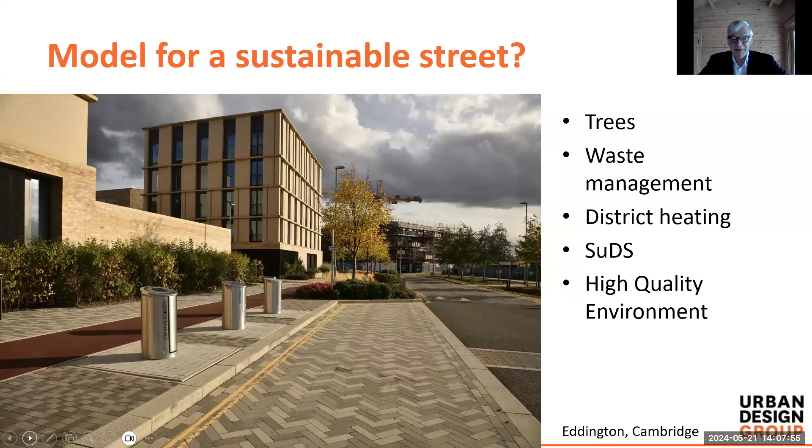This is Eddington in Cambridge - is it a model for a sustainable street? It has a number of features: you can see trees have room to grow, waste management is catered for in underground cassettes so bin bags don't clutter the footway, there's a district heating system, SuDS are incorporated, and the overall effect is a high quality environment. This tends to be the exception at the moment.

So let's look at the National Planning Policy Framework - this is one of the starting points for new development. It says that planning policies and decisions should ensure new streets are tree-lined, and that opportunities are taken to incorporate trees elsewhere in developments. It also qualifies that unless it's specific.

Is there a problem? Hello, is there a problem? No, right - no, that was background noise, Robert, continue.

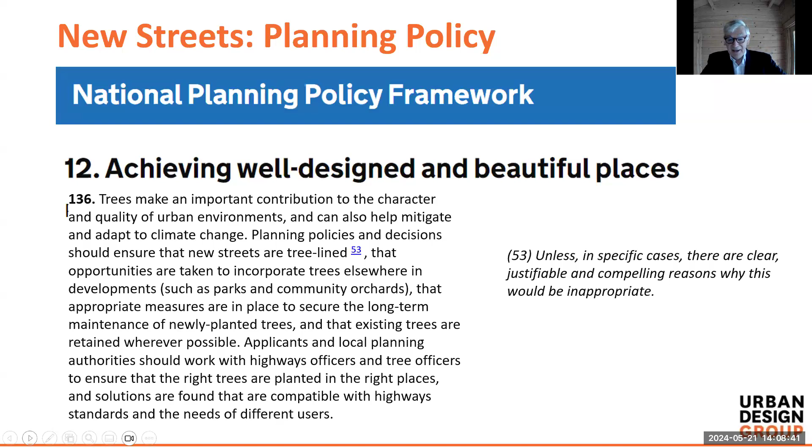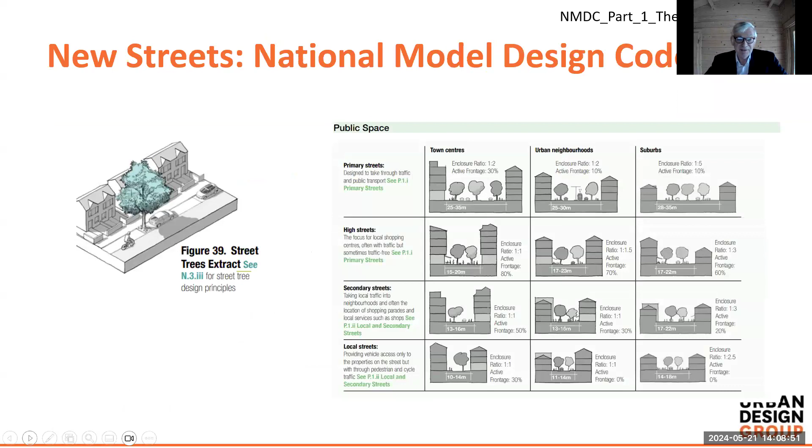Continue - yes, tree-lined streets, unless in specific cases there are clear, justifiable and compelling reasons why this would be inappropriate. There's the National Model Design Code, which contains various models for street cross-sections. Trees are covered in the coding process, and in the guidelines there are street tree design principles.

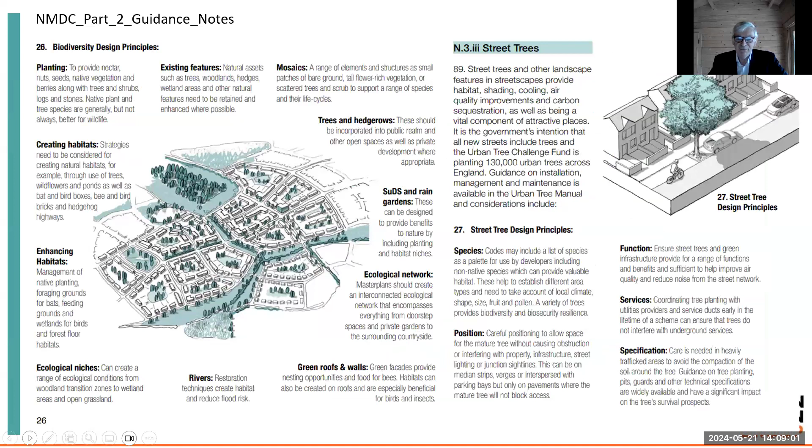So we'll leave the policy behind and go on to existing streets. So, a sustainable street retrofit.

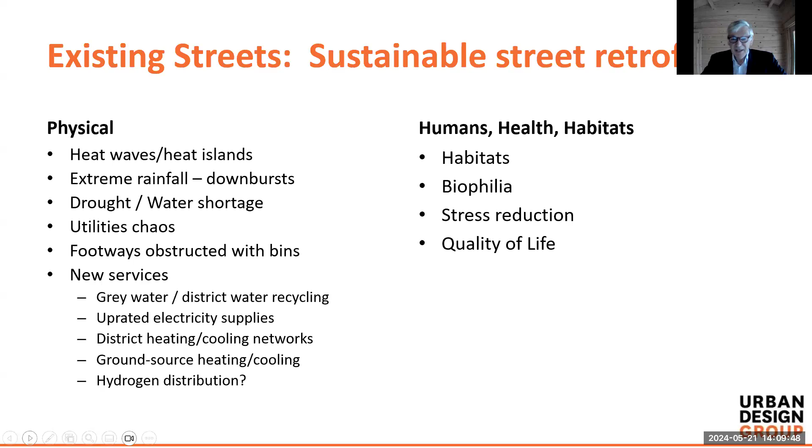We're going to face very substantial problems in the future: heat waves, heat islands, downbursts, pluvial flooding. There's the existing problem with utilities chaos, and it's something that's going to worsen as we try to work more utilities into that space - uprated electricity supplies, maybe moving over to a hydrogen distribution system, district heating and cooling networks, ground source heating. At surface level, we want to make streets more attractive places for people to enjoy and use. So sustainable street retrofit - maybe not easy, but let's have a look at this.

Balanced decisions, because we're all very siloed these days. What's the proverb? The man with a hammer sees every problem as a nail. If you're a highways maintenance person, naturally you're going to see the world's problems in terms of highways maintenance. If it's lighting, it's going to be lighting, and you don't want trees getting in the way of your lighting apparatus. Possibly if you're a tree person, you want to plant trees.

Well, the thing is that we're all part of the same local authority. It's a question of balancing all these priorities. There are things to balance. There are statutory duties - it's often quoted, the Traffic Management Act, network management duty.

This is not a duty that overrules all other duties. There are other duties - public health, duties to children. There's a common law duty of care. All of these things have to be balanced.

Similarly, the central government policies. There's the local authority's own strategy and policies, ranging from planning right through to environment. There's the Equality Act, the public sector equality duty. There's the common law of negligence. And against all of that, there is the reality of the lack of funding for maintenance.

Do remember this one - it's the Wednesbury unreasonableness principle. It's used as a basis for judicial review, but I think it's always a really good reminder as to a test for the quality of decisions that ought to be made. The decisions should be reasonable. They should take into account the things that ought to be taken into account, and they shouldn't take into account things that shouldn't be taken into account. It's common sense, really, isn't it?

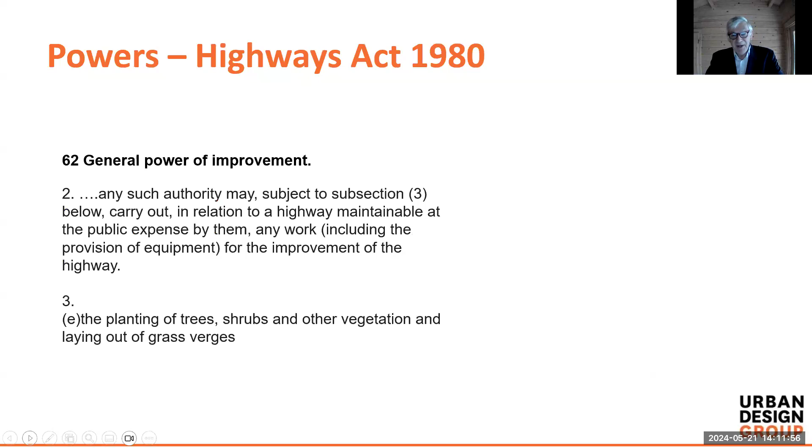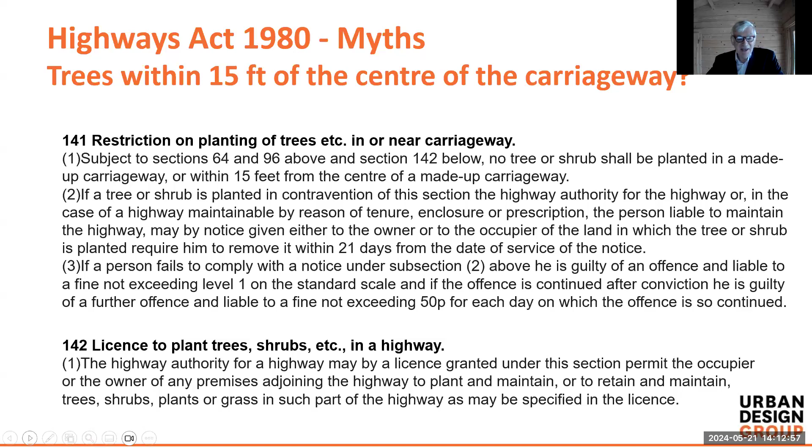And some people get scared by the legislation, and it has to be said that the Highways Act 1980 is not well drafted. There's a lot of repetition, there's a lot of confusion. It doesn't even define highways in a robust sort of way. So it's quite understandable that people pick up the wrong end of the stick. But you can plant trees within 15 feet of the centre of the carriageway. You can plant trees in the carriageway, smack in the middle, and we'll demonstrate that later on. I won't go over that.

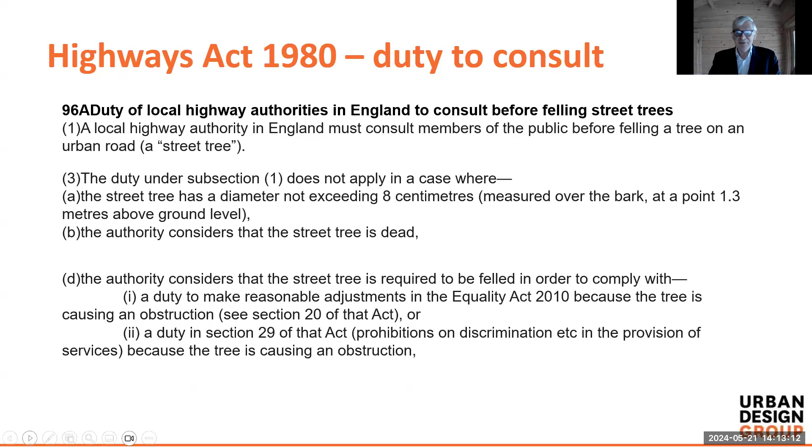There's a duty to consult before felling street trees. You can, if you're interested in this, have a look at the Highways Act. It's written in English, and if you put a towel on your head, you can understand this stuff.

So, street trees - what and where? It varies between no trees to a complete canopy, and on a range of different sorts of land. The tradition is highway maintainable at the public expense, but increasingly we're seeing holes in a highway maintainable at the public expense being held in private ownership of one sort or another, being used for planting street trees so that the highway authority avoids the maintenance burden. There's also the unadopted highway, the private street option, and then there's private land.

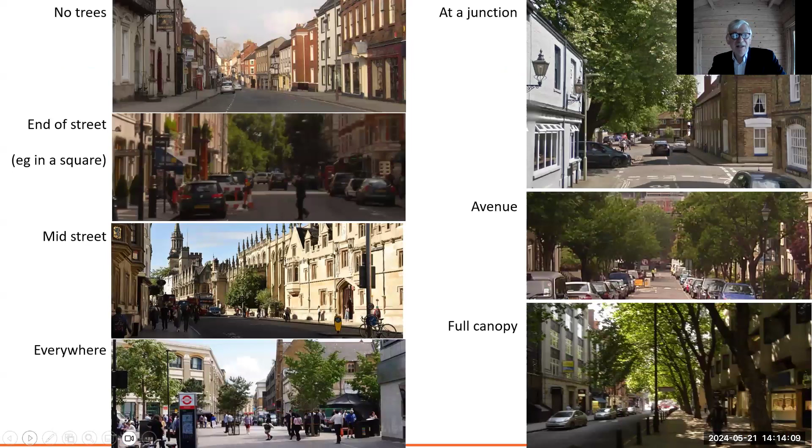There's considerable opportunities to plant trees on private land that can then oversail the highway or the street. So you can get some very big trees by using that option. Anyway, so some visual examples ranging from no trees. In medieval streets, there generally aren't trees because the streets would have been full of animals, and the animals would have eaten the trees. So the trees in medieval streets tend to be found immediately adjacent to the highway on private land, in a garden or a churchyard, that sort of thing. End of streets, in squares, at junctions, or everywhere - it can range from no trees to a full canopy.

So you feel as though you're going through a forest. Trees can be planted in a footway, in the carriageway, in build-outs, in the central median, in parking strips, in verges. There's endless opportunities to plant trees. Let your imagination run riot and know that the Highways Act 1980 gives powers to plant trees, full stop.

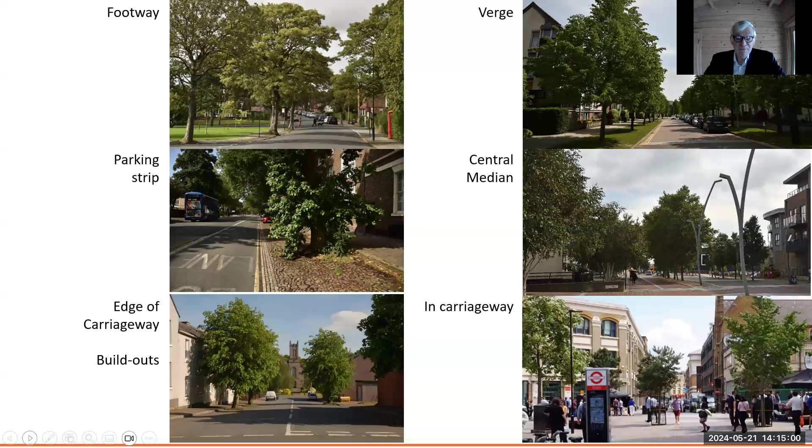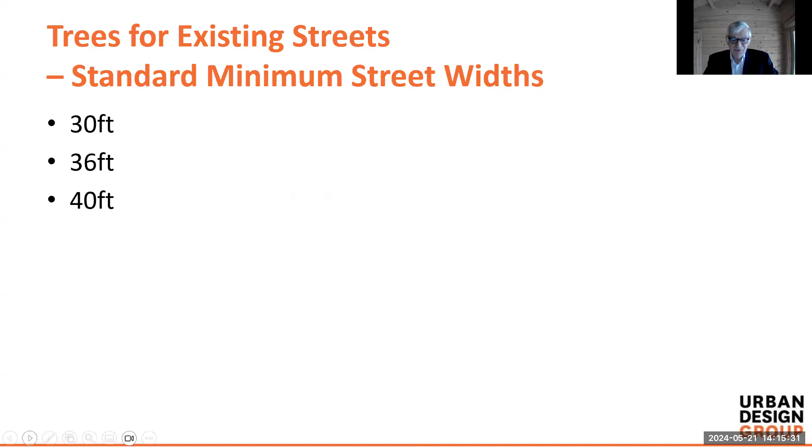I'm not suggesting that should be an option for a lot of streets, but anyway, it can be done. So let's look at existing streets. There are standard minimum street widths that have persisted for centuries. The 1847 Town Improvement Clauses Act set the minimum width of a highway as 30 foot. This applies to towns, so we're talking about urban areas, not rural areas.

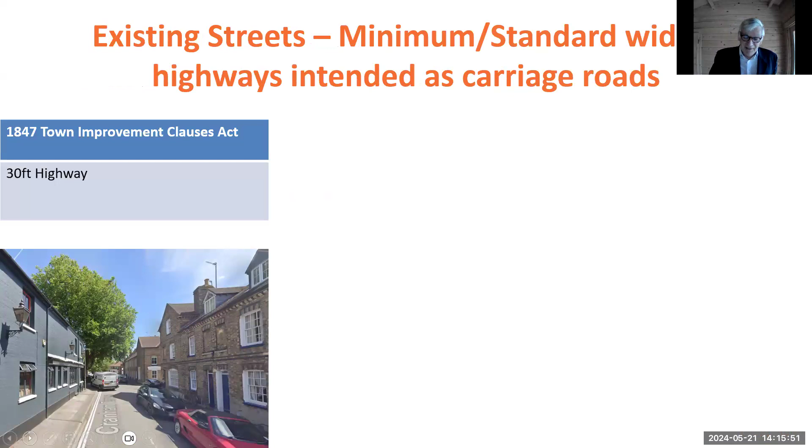Difficult to get a street tree in these circumstances, but you can put it on private land. The 1875 Public Health Act created the provision of the model bylaws, a sort of building regulations manual for streets of the day. This set the minimum width of a highway intended as a carriage road as 36 foot between the building lines, 24 foot width for the carriageway - a width we don't approve of nowadays because it encourages close passing of cyclists when they're being overtaken by car users - and two 6-foot footways, or footways of at least 6 foot on either side.

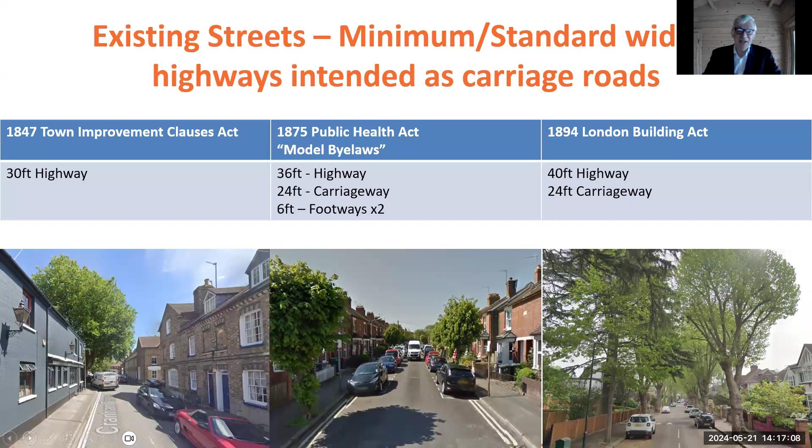The London Building Act 1894 increased the minimum width to 40 foot, and that 40-foot width got picked up in many other areas as well, going beyond the 36-foot standard required in the model bylaws. So this now applies to boroughs, urban district councils, cities. It doesn't apply if the local authority in question was a rural district council. But you have to go back into your local government history to ascertain what was the council in that particular area.

This is Blackpool. I think this is a 30-foot street. I forgot to measure it, but you can see there's no trees at all. Well, you may regard this as being a bit grim now, but when it was built, it would have been a lot better than the conditions that a large majority of the population would have been living in.

A street in Crewe. This is a classic bylaw street, 36 foot wide, 6 foot footways, 24 foot carriageway. The reason for 24 foot was so that you could have a vehicle parked on either side of the road with room for a third to go through the middle. And that's what you find in a lot of these streets. Once people start parking in the footway, then everybody tends to do it.

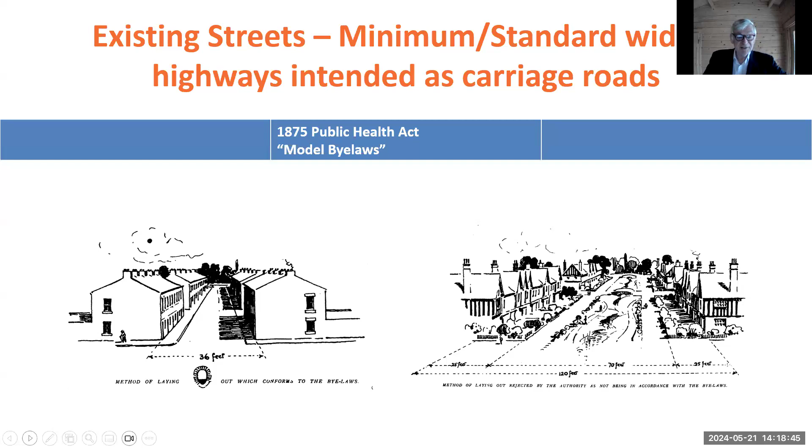People are getting more and more enthusiastic about trees, landscape feature, greenery, open spaces, clean air, and healthy country living, that sort of stuff. And it's reflected in various movements, like the Town and Country Planning Association. So this is a model village in York, New Earswick, and you can see the sort of landscapes and streetscapes being delivered - lower density, plenty of trees and grass verges.

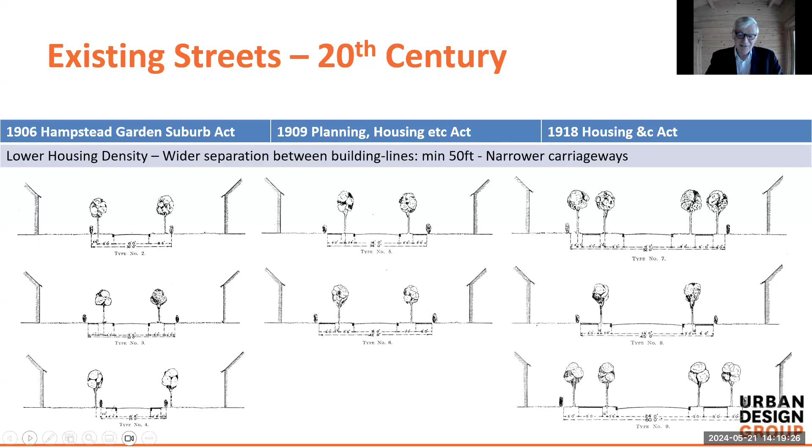So into the 20th century, we've got streets being designed with trees incorporated right from the outset. So the problems are going to be very much with 19th century streets and prior, in terms of introducing new trees.

So challenges, damage to footways - I'll come to in just a moment - but some people say you don't want to plant trees because they're a hazard to drivers. There's currently a movement to adopt a systems approach to roadside safety - passive safety, it's called, crash-friendly roadside environments.

Frangible posts and columns are being introduced, and there's the case of Marc Bolan, rock musician, who died when the car in which he was being driven left the road and hit a tree, although apparently death was due to hitting a post rather than the tree. Well, yes, nobody wants anybody to be injured or killed on the road. The thing is, when you get to an urban area, it's not just trees, and you don't want to crash into a tree - the car is not going to come off well.

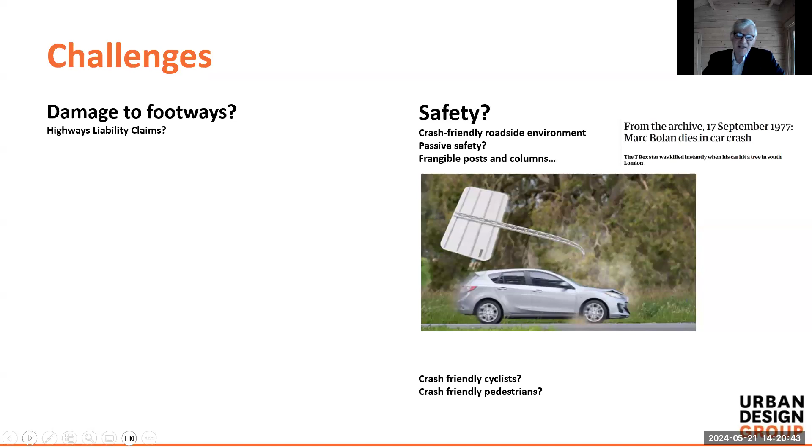But there are going to be vulnerable road users occupying the same environment, and cars and vehicles should not be leaving the road at all. Just as much as a car could hit a tree, it could hit a pedestrian or a cyclist, and cyclists and pedestrians are not crash friendly.

Footway defects - well, the main issue there is utilities opening and the overrunning of footways by vehicles. The repeated opening of highways breaks the surface, and the remediation is very rarely conducted in a robust way. Compaction doesn't occur, so the surface will subside and produce a trip hazard.

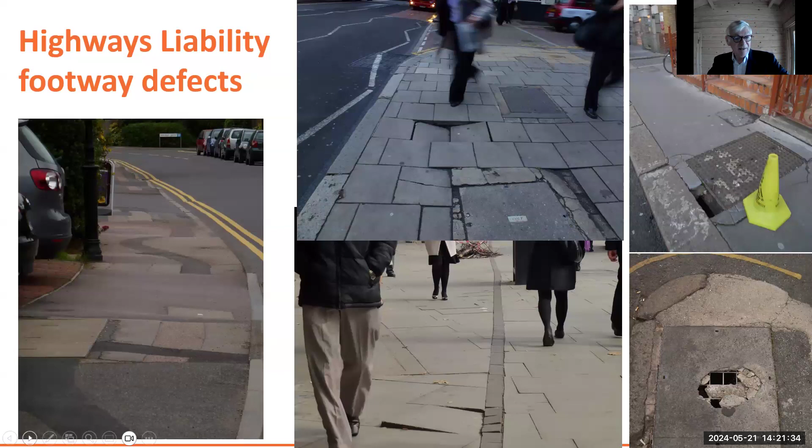It is possible for street trees to lift paving slabs, but it's something that can be dealt with by maintenance. It's hugely important, and we're back to this balanced decision making. Trees can produce problems, but problems do have solutions. And if it's a toss-up between no trees and trees with occasional problems that can be addressed by maintenance, let's go for trees and maintenance.

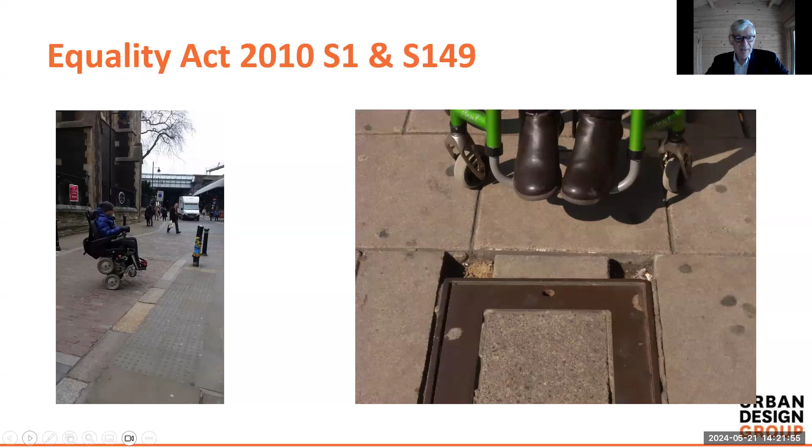Are these material obstructions, hindrances, or inconveniences? Just as much as a tree planted in a footway - one could say it's obstructing the highway, but is it a material obstruction? Is it actually stopping people from getting past? In the vast majority of instances, it won't be stopping people getting past. It will be a temporary hindrance in the way, but people can get past it.

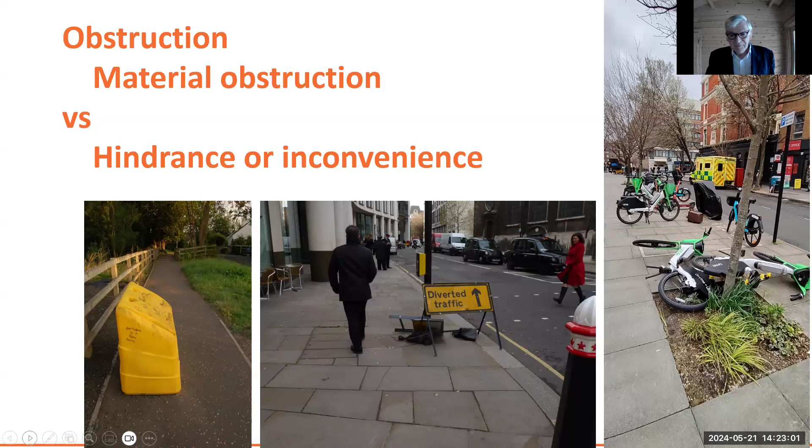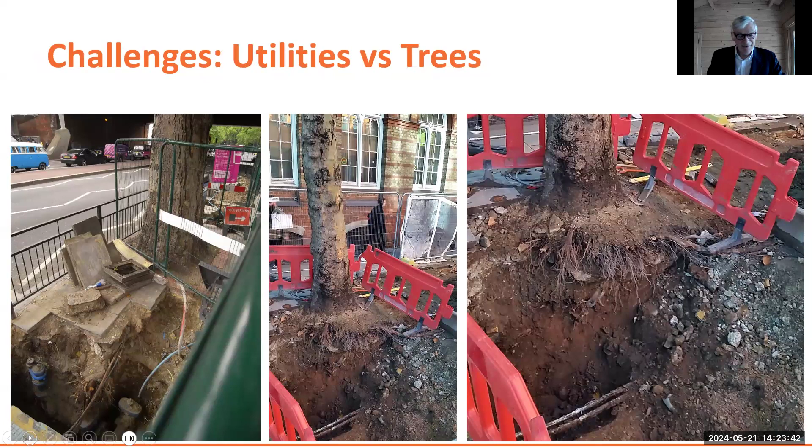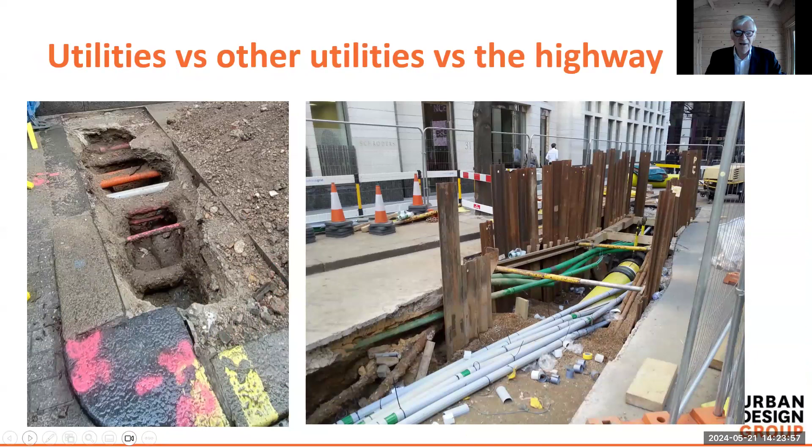But utilities are problems within themselves - they're in conflict with each other. Often utilities openings to repair utilities will damage other utilities, and there's this perpetual cycle. Most urban streets are absolutely crammed full of pipes, cables, conduits, and well, there's been guidance, but is it fit for modern purposes?

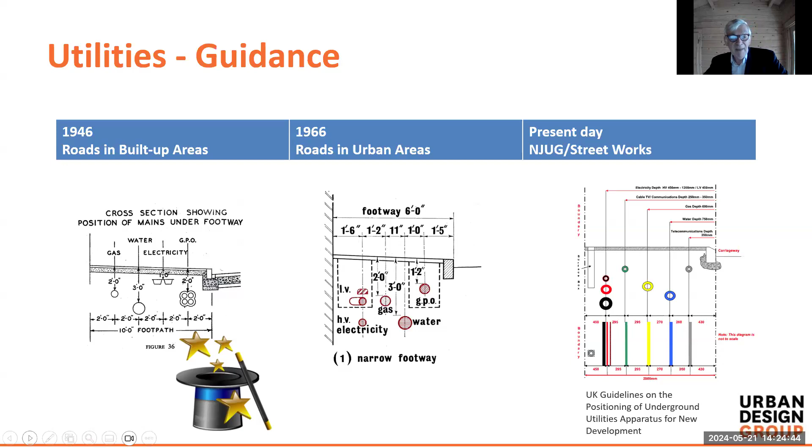On the left, 1946, you've got a cross-section of a footway. It refers to a 10-foot footpath. Well, I don't think there are an awful lot of 10-foot footpaths or footways, so a bit of magical thinking there - that's why that hat's there, by the way. On the right-hand side, the present-day National Joint Utilities Group, or Streetworks, guidance. As you can see, there's just a direct evolutionary path. Say probably for over 100 years, they've been doing basically the same sort of thing, although the amount and sophistication of utilities has increased quite dramatically.

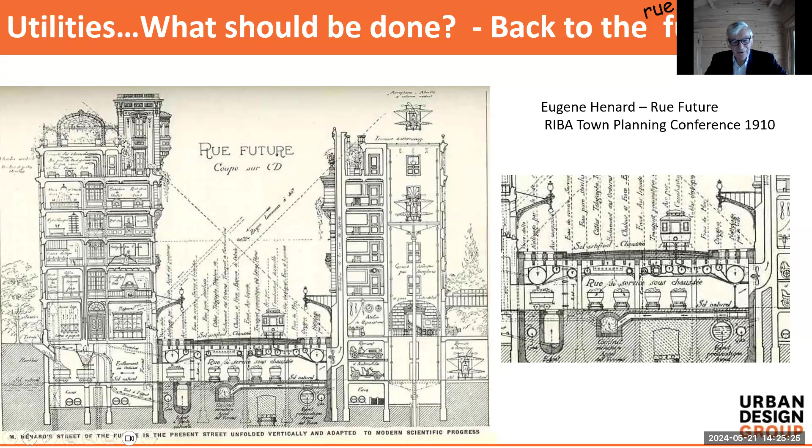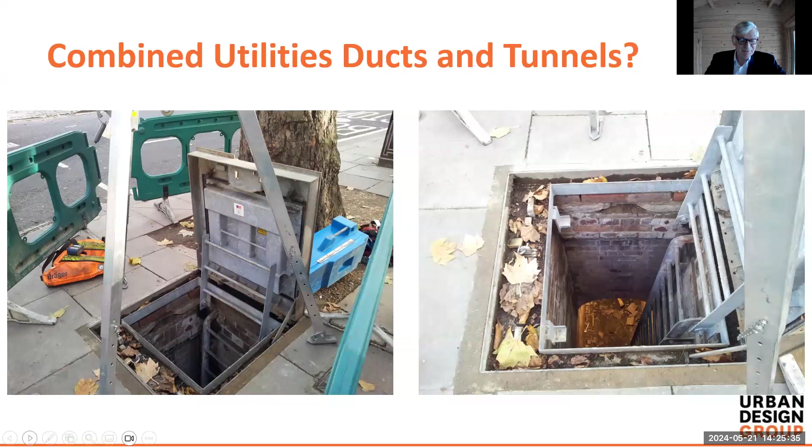Also, over 100 years ago, there was a bloke called Eugene Henard, who gave a paper at the Royal Institute of British Architects Town Planning Conference on the future, and he advocated this fully designed approach to incorporating utilities and services. Maybe if we're going to sweat our streets, encourage compact city living, and create environments that can deal with all that climate change can and will throw at us, then maybe we need to be thinking something along these lines. There are combined utilities ducts and tunnels. In some cities you can find these - more on the continent than in the UK, because perhaps we're a bit backward when it comes to these things, shockingly.

There's the National Underground Asset Register that is being brought through. The notion is that within a couple of years, this will be available, and all underground assets will have been properly mapped. And the detail provided by the mapping will increase progressively over time.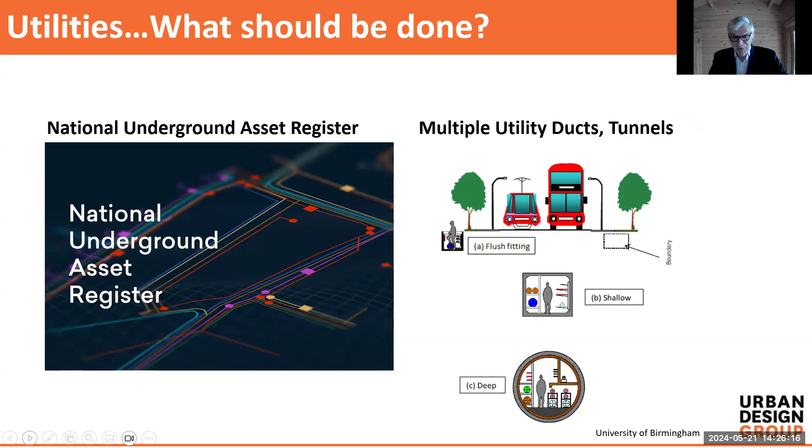The University of Birmingham has been doing a tremendous amount of research on multiple utility ducts and tunnels. Once we can get the utilities ordered, a place for everything and everything in its place, then space will be yielded to do other things. Maybe, just as we've got a national model design code, we need a national underground design code that covers all of the things we will increasingly need to place under the surfaces of streets, ranging from drainage through to energy, sewerage, communications, and of course, tree roots.

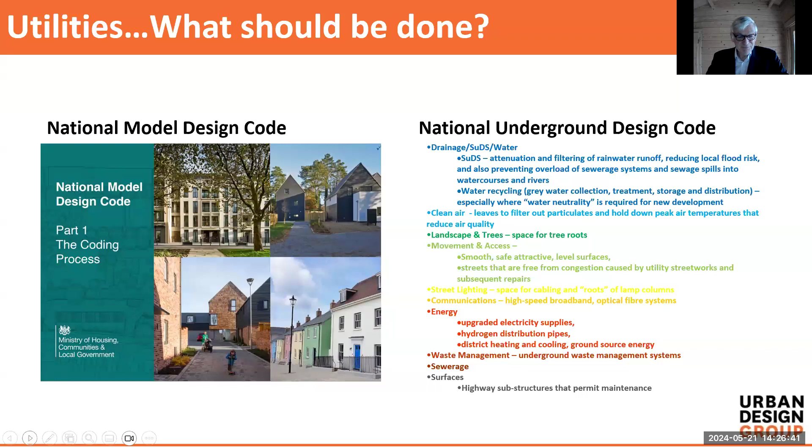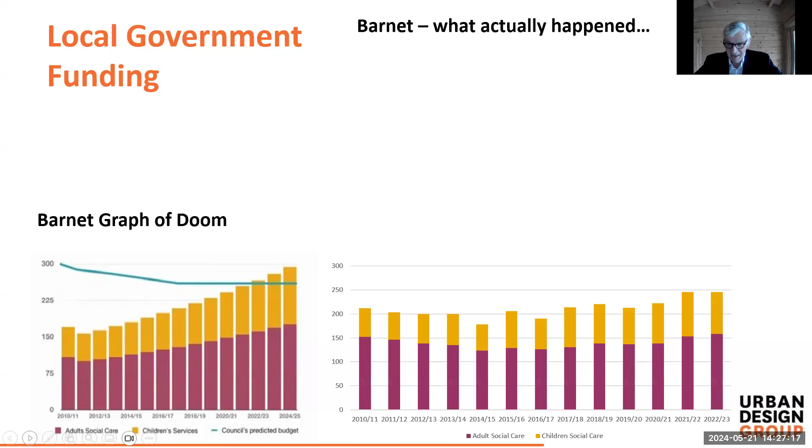What actually happened? Well, it wasn't quite as bad as that, but the demand for expenditure on children's social care has gone up significantly. And local authorities are constantly being criticised in the press for the quality of care provided. It's a pretty grim time to be in a local authority.

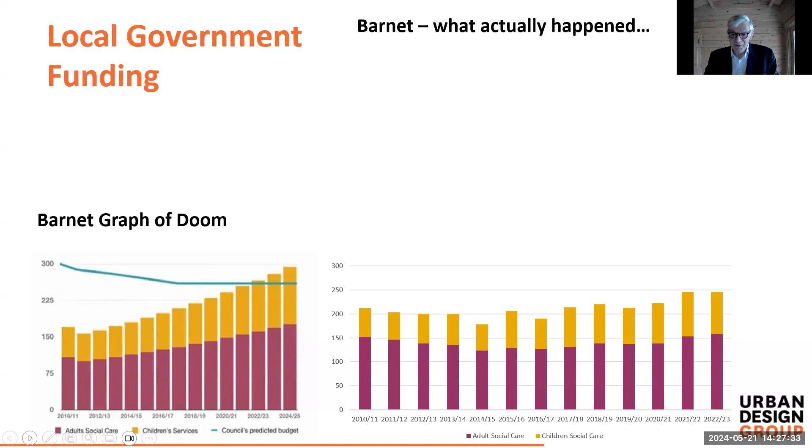And what happened on the funding side? Well, for Barnet, their core spending power was down by 10%, and the settlement funding, the money given to local authorities by central government, was down by 72.9%. That's a huge change.

The highways budget for Barnet over that same period declined and has been unstable, and it must be hellishly difficult to operate under those circumstances. There was a boost in budgets over the COVID period, so I guess it'll be a few years yet before we establish how much damage is being done by the reduction in funding.

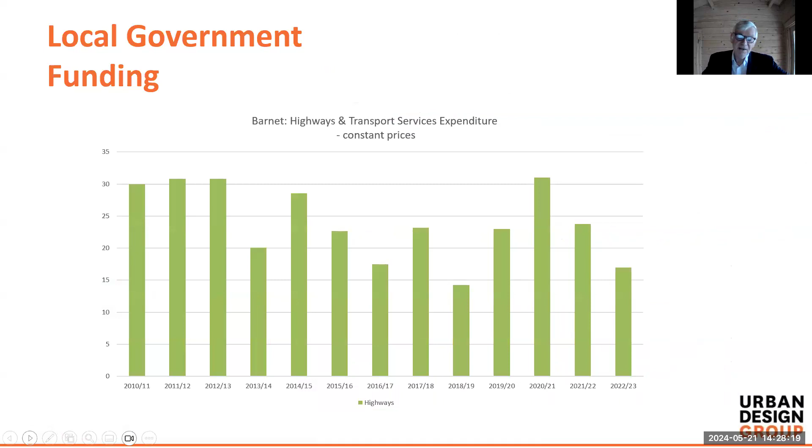And of course, street trees are funded through the highways side of things. If you look at the budgets for England as a whole, figures are in terms of millions. The highways budget England-wide started off at about 6.7 billion, and this is in constant prices adjusted for inflation, declined progressively, and currently, for this last financial year, it was back to 6.6 billion.

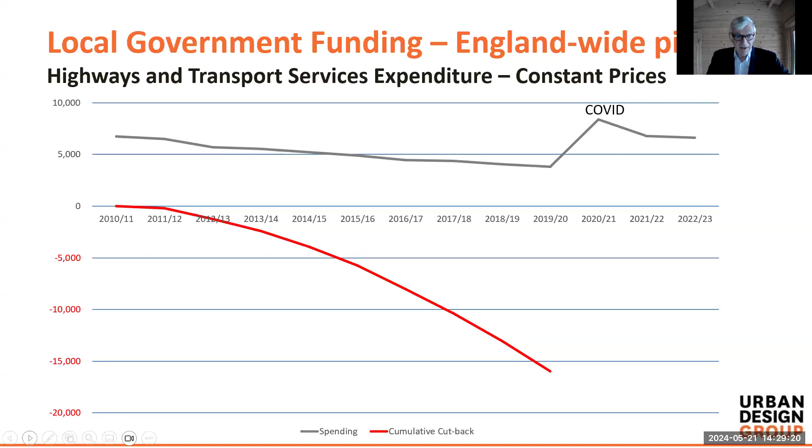But if you add up all the cumulative cutbacks, it's massive — over 16 billion pounds is the deficiency in funding. And we've had the same highways. So things have been really uncomfortable, and you can understand highway authorities' local authority departments going through a lot of grief over that period.

And what are the consequences of scarce funding? Well, funding starts to be the overweening design imperative. For highways maintainable at the public expense, we're getting utilitarian streets, poor quality, cheap material specification, or a requirement for maintenance specifications, design specifications that will require virtually no maintenance. You've got highway authorities requiring huge commuted sums, maybe as much as £2,000 or £3,000 per tree.

And in some instances, highway authorities don't want to adopt streets at all. We've had this issue of holey streets before, where sections of the street are left in private ownership, be it a grass verge, be it a tree pit. This creates a really messy sort of situation, and surely it doesn't make an awful lot of common sense somehow to divide responsibility.

I'm going to have to ask you to wrap up very shortly. I'll be wrapping up, but this is the last one. Can you see my camera? I've switched my camera on. Can you see me?

No, I can't. Sorry. Oh, okay, right. And private streets, well, that's the last option. There's a possibility of higher specs, but it comes with, in effect, creating another tier of local government. Perhaps I should shut up at that point. This is the last slide, so I'll stop the share.

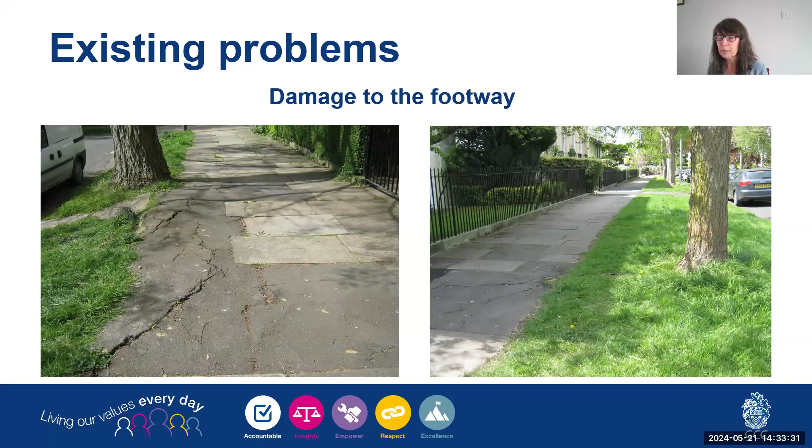But some of the existing problems, we have a legacy where we have a lot of street trees that have been poorly planted. They're damaging the urban realm. Root heave of footways is the biggest problem, by far the biggest problem. It's not just unsightly and causes maintenance issues, it causes real safety issues, and the safety issues it causes are to the most vulnerable users. So people with sensory impairment, people with restricted mobility, the people that we really need to be protecting.

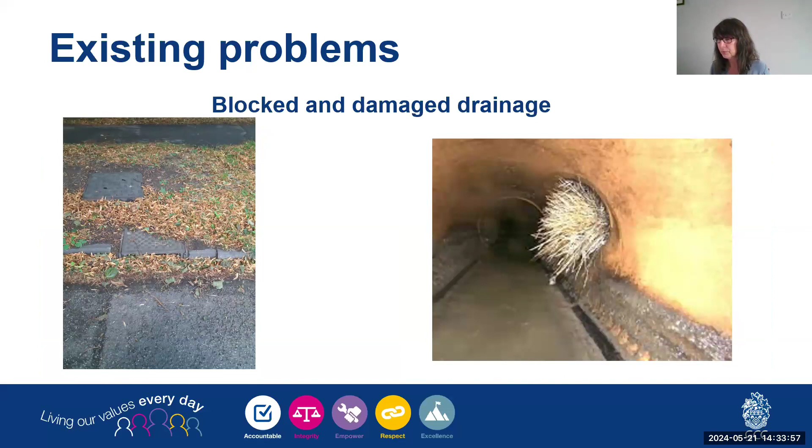Another big problem is blocking the drainage. Tree roots seek water, of course they do. And leaf fall as well, as you can see on the image on the left, they can block gullies. They can block gullies in the way that you can see, but also that leaf litter gets flushed through the system, and that can also block the drainage system, leading to problems further down.

You're going to have dark spots. Street lights are put in the places they're put in for the very good reason that that's where they're needed. So you're going to create safety issues by dark spots with having trees. That could be a sign, you can have trees overgrowing signs.

And the result of all this, unfortunately, is the tree dies or the highway infrastructure is damaged, quite often both. This leads to poor use of the highway maintenance budget. Robert mentioned quite a lot of highways maintenance budget. We have a very, very small budget, it is shrinking, we have to use it very, very wisely.

And quite often the tree will just be cut down. It won't be replaced, we don't have the budget to do that. This lovely built environment with trees that we want to create, we're just kind of making it worse by having trees inappropriately growing that we're then later cutting down.

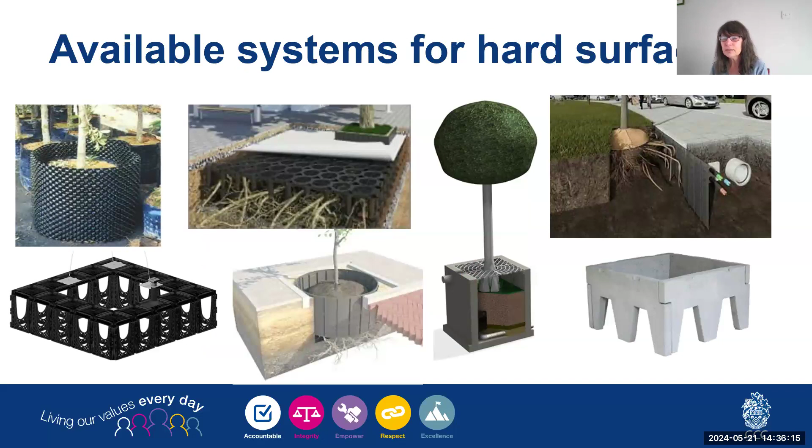And this leads to another problem: the design of it. So we as engineers need to select the right design. This is just a very small selection of some of the drawings that I get presented with for highway adoption checks. I don't know.

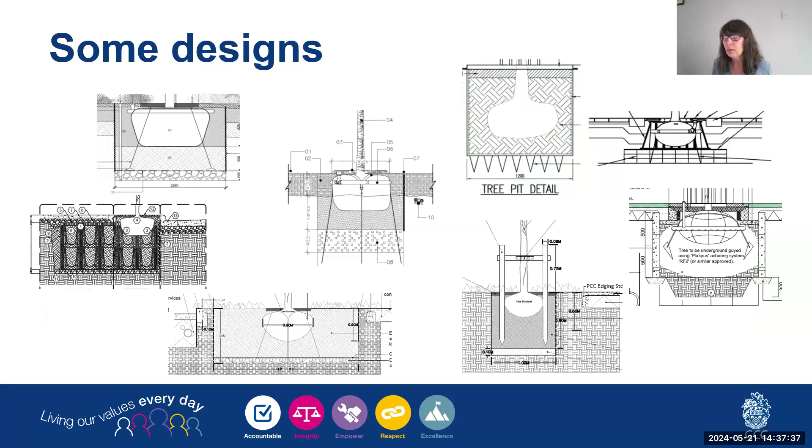And there is guidance out there, some very good guidance. But what it doesn't do is give us the very detailed planting advice. A lot of this guidance uses words like 'you must consider' and 'think about this' and 'take this into consideration.' It doesn't give you the exact detail, like I had on the previous page, of exactly what we need to know.

So just to bring this back to what I was asked to talk about, what we need the guidance to help us with: we want to deliver thriving trees, and we really do. We don't want to cut them down. We want them to be an asset, not a burden, not a maintenance burden to current or future generations.

But to do this, we need to know the right species for the location. We need to know the right planting method for that tree. So choose the right tree, put it in the right place, and plant it the right way. We need to know the correct construction method for the tree planting, and the right growing medium, and how to correctly check it.

So when we're given these different drawings by developers and their contractors, we need to know what's right and what's wrong, and how to advise them to get it right. We need to know how to inspect it when they're planting the tree and putting in the construction. And after it's all planted nicely, right tree, right location, right way of planting, we then need to know how to maintain it properly, with the correct short and long-term maintenance regime.

This is a quick overview we like to include in our presentations. It shows the overlap between the urban environment and a rural environment, and where we want to get to, especially with the incorporation of trees and planting and sustainable drainage within urban spaces.

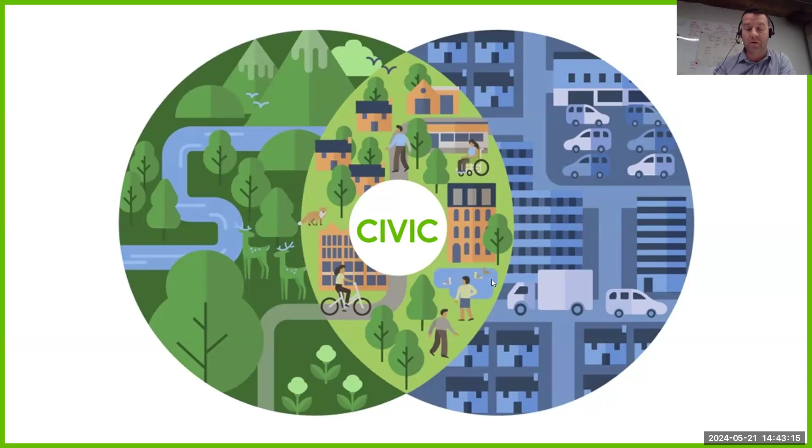Trees are fundamental to that overlap. These are some of the documents Civic Engineers have been involved in - our experience and contributions to relevant guidance, SUDS guidance in London, Leeds, Our Spaces - and they all include planting and requirements for implementation of trees. I don't think anyone's questioning that it's good for streetscapes and public realm areas - the crux of it is really just how it's delivered.

Some of the key design considerations - there are probably many more, and this is probably too many to run through in one slide, but you get a picture of what all the considerations need to be from a design perspective.

I think every design starts from a vision. There needs to be a vision for that particular street, that particular public space, and then working around the clock from that are all the different factors that play into it.

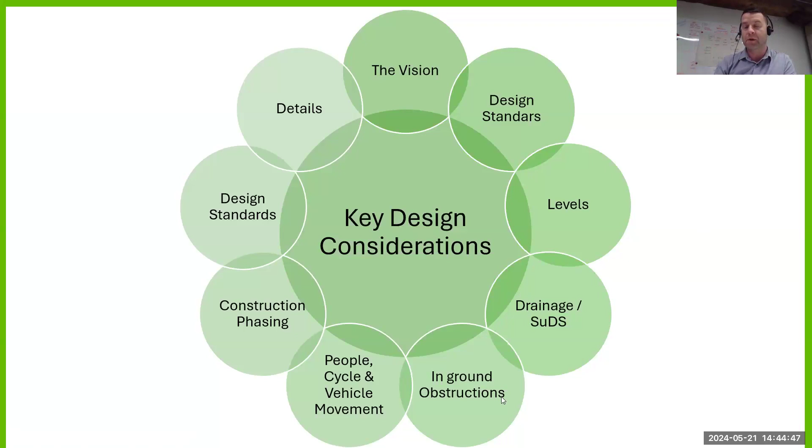One of the big ones, which has already been touched on - Robert went into quite a bit of detail on this, and there may be some overlap with slides that are due to come from me - is what's in the ground, in-ground obstructions. Predominantly that's utilities, but it can be other obstructions as well, and I'll show a few examples of what that might be.

The design and application - a key document really, which was probably a breath of fresh air from the standard Design Manual for Roads and Bridges approach, and guidance which focuses on creating spaces for multiple users of that space rather than just being car-dominated spaces.

In that, it's good to understand what space and what street you actually have. If it's quite a high movement status, as in your motorways and dual carriageways and A roads, then it's quite difficult - there's not really a place focus there. So the type of street, the type of road, determines the amount of planting and street trees that sits within that.

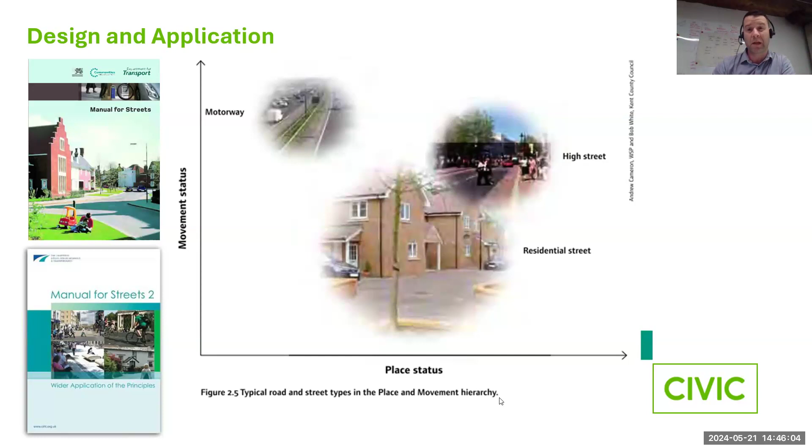So it's also good to understand that very early on - what road are you actually looking at? Is it a retrofit? Is it a new road? Is it a new residential street? That really dictates the level and detail around that planting eventually.

Again, some of the key design considerations - what I wanted to get across is that there are opportunities, especially with vehicles, pedestrians, cycling, in terms of how space is linked to the wider areas. Obviously the street planting and street trees needs to be considerate of what's in the wider area as well, rather than just focusing on that street.

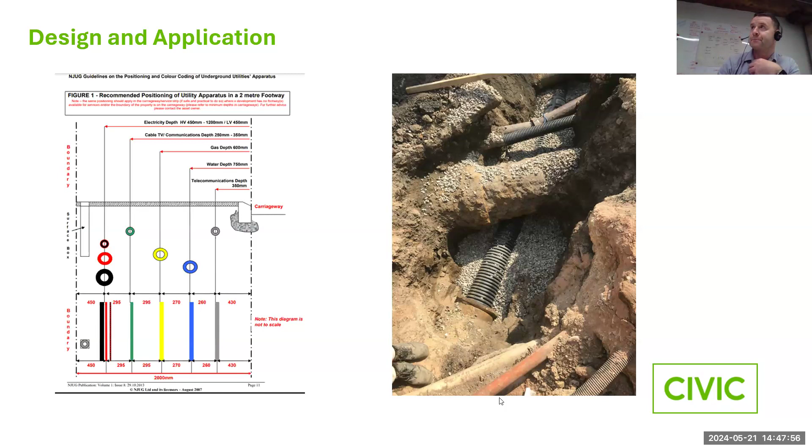This again just shows you the type of information, and it's quite important to get hold of all existing utility information, stats plans, undertake GPR surveys, and pinpoint key locations for where additional intrusive investigation needs to be undertaken.

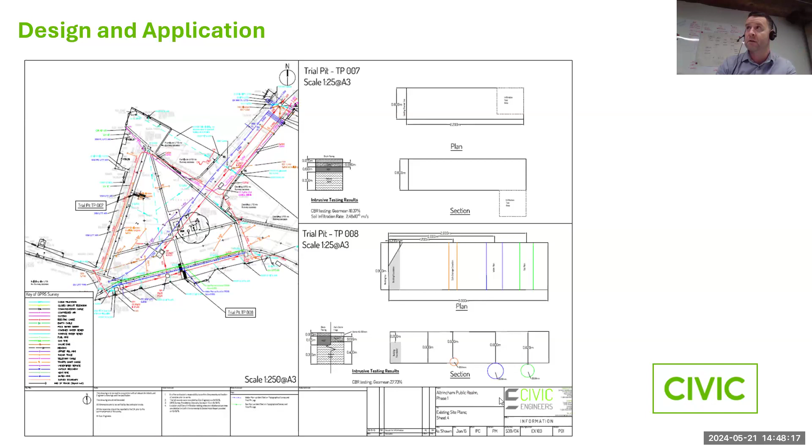This particular example is in Manchester, known as the Medieval Quarter near the cathedral. There was not just the kind of utility considerations here, but there was a series of catacombs beneath the adopted highway and the public realm space.

You may have seen this sort of scheme - it was the Glade of Light memorial to the Manchester bomb victims. It was good to obtain not just stats plans and records, but also historic records.

This also applies to public realm spaces where I've had personal experience where there's buildings with basements, or shops with basements, and it's not obvious from a topo survey or even a GPR survey that there are light wells that project out into the footway, just capped over in certain points. So all the information you can get really gives you as much information in terms of what might be in the ground, so you can start to map out and inform the design and the layout.

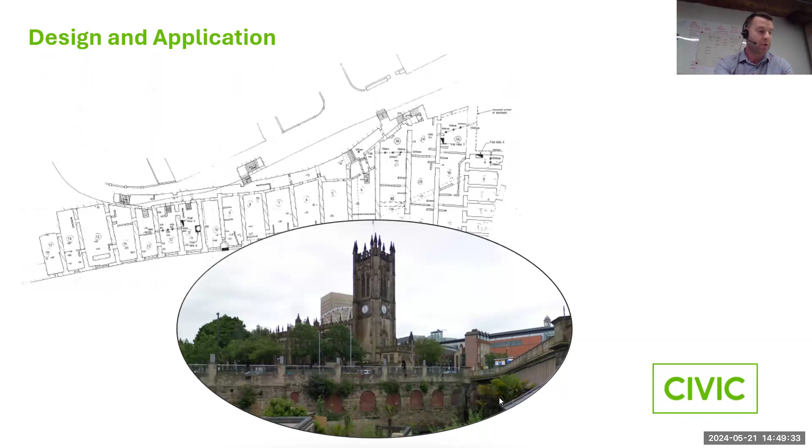What we started to do was use that information and start to layer up where we could potentially install trees within that space. You can actually see there are quite clear zones between some of the utilities that were picked up from the GPR survey. So we really targeted those as where we could position trees, and there was obviously a coordination exercise between us as engineers and the landscape architect, and looking at what shops front onto those spaces.

You can't just, because there's a clear space in the ground, place a tree there - it has to be considerate of where it is in relation to a shop frontage.

GPR survey, I just saw that question flash up - it's a ground penetrating radar survey. Basically what that does is scan the surface of the ground and pick up anomalies within the ground, mainly metallic objects, so cables and gas mains - cast iron gas mains will be picked up quite clearly. Plastic doesn't get picked up by the magnetic detection, so that's when trial pits or excavations are needed to expose the services.

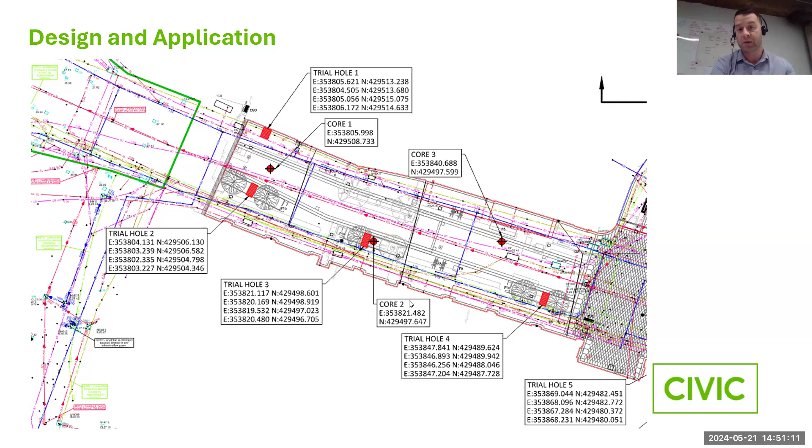Once we've worked out the layout and where trees could sit within the public space or highway, it really comes down to the detail and considerations of what trees need. I know it was touched on within the last slide from Hen about the various options there are for tree planting within hard landscaped areas.

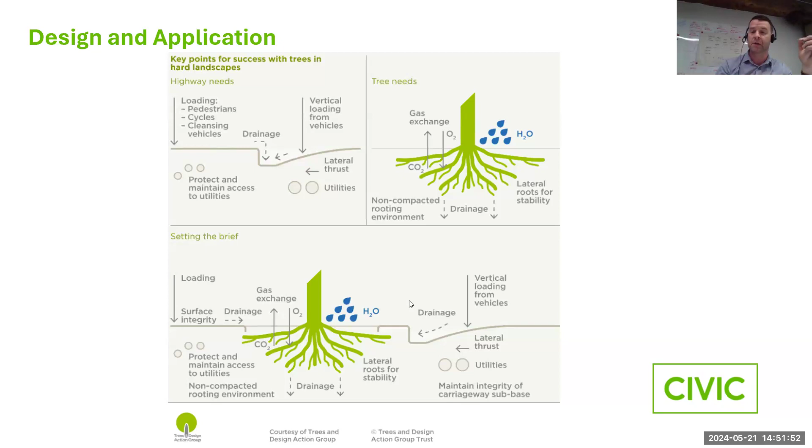The sort of cellular type systems, structural soils - I think these are some of the examples as well, and some of the kind of real life examples.

From my experience, the best approach is to try and locate trees within soft landscaping. So if you can introduce a stretch of planting or soft landscaping...

Those tree pits actually function as a sustainable drainage feature as well, so that the surfacing around the top of the tree pit allows water to permeate through and utilize the storage within the cells as well.

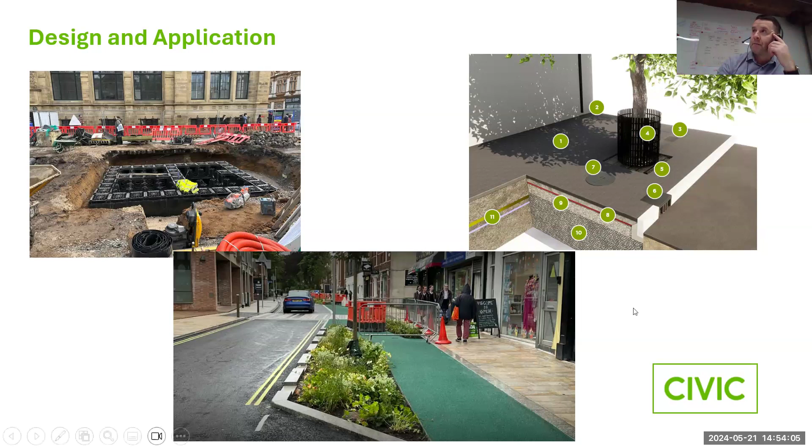This leads on to developing the details for the tree pits, and there's absolutely loads of variations for this. With the best will in the world, standard details for this type of tree pit arrangement depend on what's in the ground, and unfortunately that tends to come out once work starts on site. But as much survey information as you can gather beforehand, the better, in order to set this out.

I think this is the type of detail that would apply to a new street, for example a residential development, where there's a clear service zone and a clear planting zone where trees can be located. It goes back to the carriageway and highway widths and the typologies in terms of that street cross section.

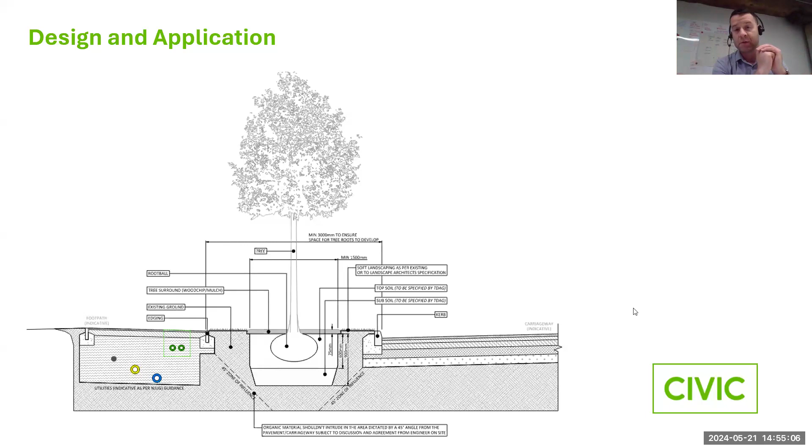Again, quite lucky on that scheme to be blessed with so much space - it's not always the case.

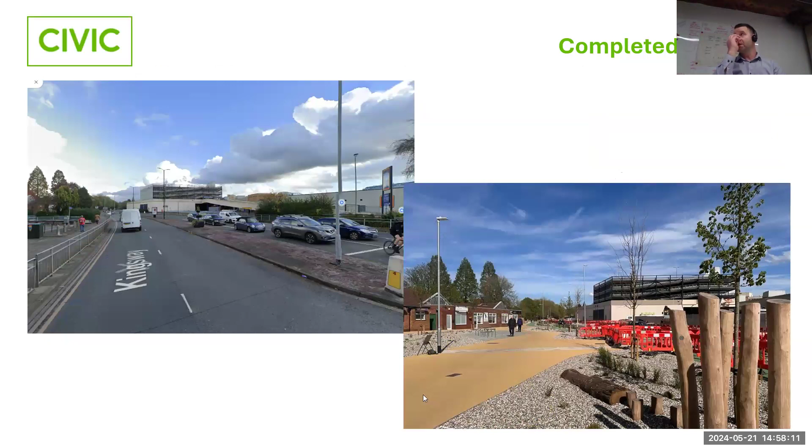This is a current scheme, another one in Manchester - sorry, it is Stretford in Manchester. Phase one is complete on this scheme at the moment, but we've taken a dual carriageway and transformed it into a single carriageway. Again, very blessed with space on this one, but all the trees are planted within soft landscaping - you can see the gravel to the top there. This will establish a lot more. This was probably taken maybe a month ago, so it was only planted a month or so before that, so there's a lot more establishment to come. But it just shows you what you can achieve if you do have that space.

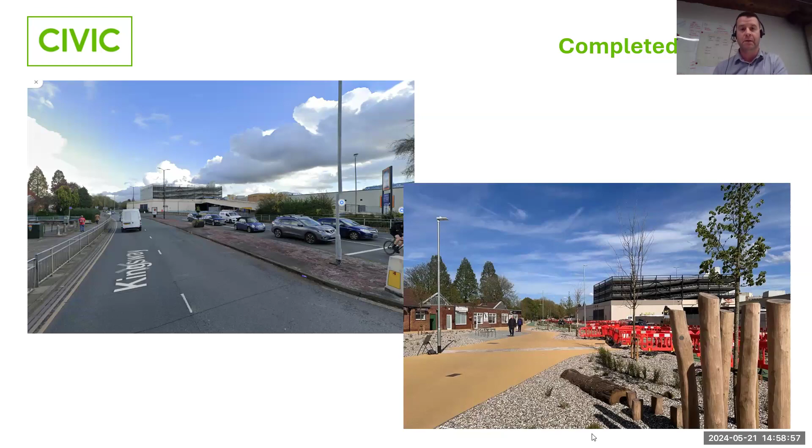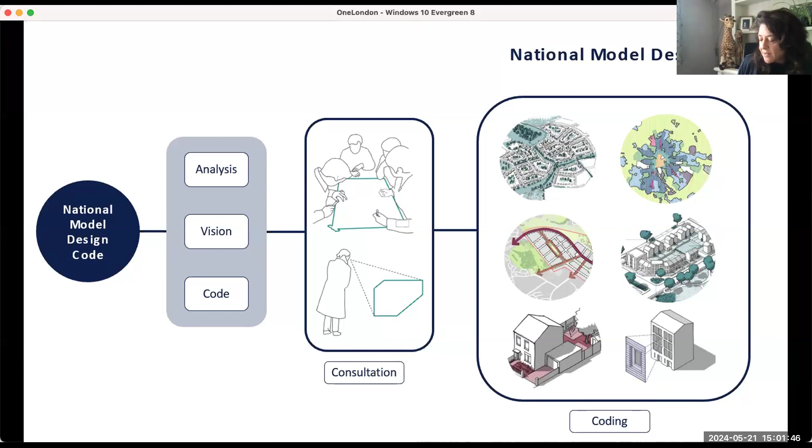So the National Model Design Code that Robert mentioned right at the beginning of the session has a theory or concept within it. It isn't actually a code itself, although it can be used for that - it's more a methodology for local authorities to produce codes. The idea is you look at your place, your area - it's authority-wide, or a particular town centre or site - and you analyse it, work out what you want to achieve, and provide clear, definitive, measurable codes which can be used to support and direct the design. The concept is that this will add certainty, it pulls decision making up front in the planning system, and it involves local people so they can say what they want and what they find agreeable and acceptable in terms of change in their area.

And then we've got the National Planning Policy Framework. I'm going to focus on planning here as opposed to highway requirements, which says quite a few different things, but basically it's saying these codes and design guides, master plans or spatial plans - this is how these requirements, which are non-spatial, land spatially in a place, so where they fit.

So when we're talking about street trees, the code or the guide can say what sort of street tree, what type of pit, and how many, and the master plan or a town plan or some sort of spatial plan will explain where that relates to.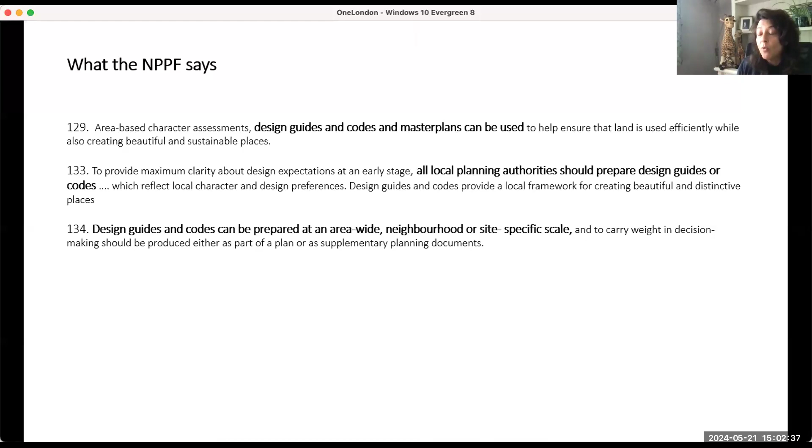Local authorities can, as far as the NPPF is concerned, do this at different spatial scales - for their whole authority-wide area, for a neighbourhood, or for particular sites.

But the LURA itself, which is the Levelling Up and Regeneration Act, is a little bit more confusing because the wording keeps changing and we're all trying to work out what it all means. The act itself is important because the NPPF can keep changing, and it will change in the not too distant future.

The act says local authorities have to set out your design requirements for the whole of your area, although those do not have to cover every aspect of design, every part of the area, for every type of design issue or every type of development.

So it's kind of pick and mix, because you couldn't write a code for a local authority that covered all types of development, all design elements of those developments, for everywhere.

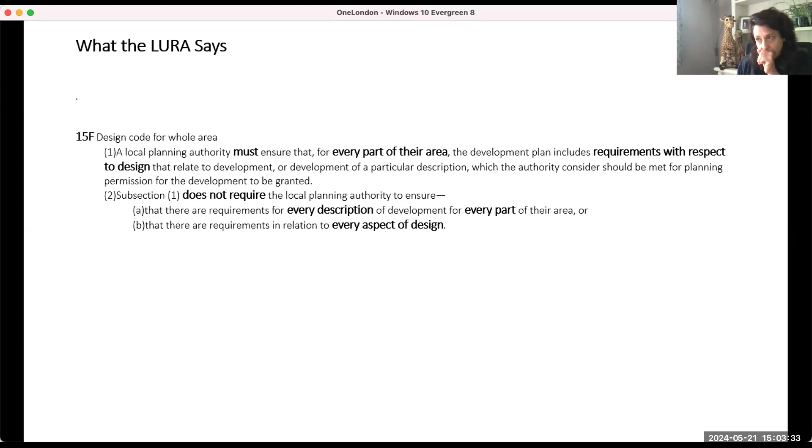The idea is that you really understand the priorities for different parts of your local authority through doing that upfront analysis. So you're identifying the problems, which could be a lack of street trees, for example.

You do a character appraisal that explains where you've got more street trees, where you haven't, where you need them because the streets are overheating in terms of the environment for using the street as a place, but also the buildings around them are getting too hot, or because you want to clean the air there, or change the image or character of the area to support new development or improve regeneration, etc.

And you talk to people - engagement with the people who are using that area. What is it that you think is important?

Some lessons there probably from that Sheffield example, although they're doing some fantastic SUDs now.

Then you kind of work out your coding plan. So you might say, right, these types of residential areas, Metroland for example, taking the example of street trees, we are going to look for this type of tree, put in this way, in this part.

It could be building out - you allow space for 4 on-street car parking spaces, then you take out a car parking space and you put it in what's now the carriageway, not in the pavement where there's more likely to be utilities. You put in a tree and maybe a swing or a bench and some SUDs, and you do that all the way down. So that's the sort of thing you say - we'll do that in this area, but this town centre will have a different approach.

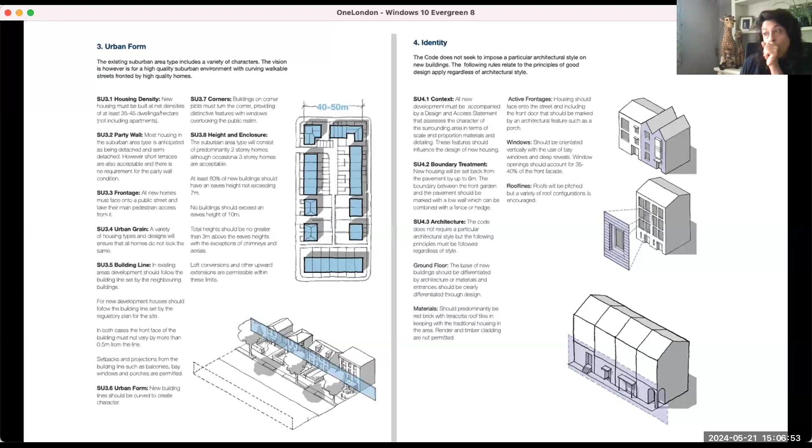That bottom picture, on both sides, is showing how there's a strong interface between the outdoor spaces and the buildings themselves, and how that works. And then they may talk about types of windows, etc.

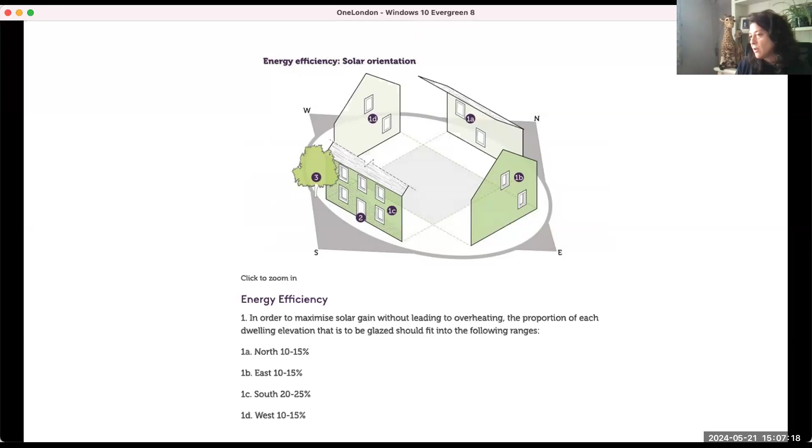So that's the sort of thing in codes about buildings. Sometimes they're much more focused, looking at their priorities and issues on solar orientation. This particular code is saying we're going to specify how much fenestration we want on different elevations, to make sure homes aren't too expensive to heat because they're not getting solar gain, but also aren't going to overheat. So that's a different sort of example.

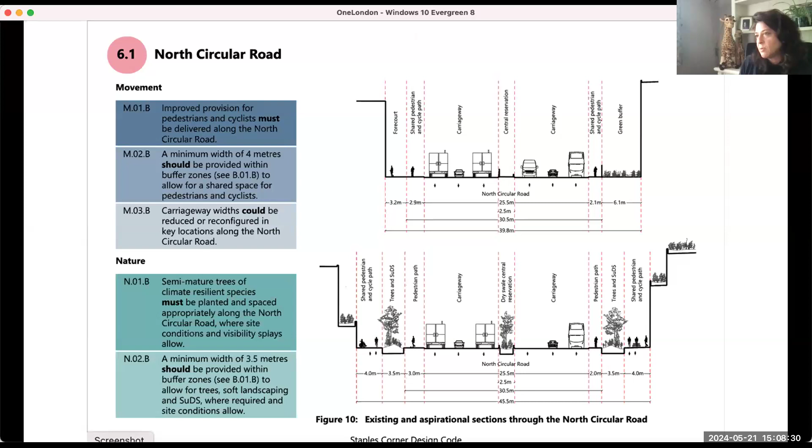You can see they're splitting up the road. This is an existing road, so this is about changing the North Circular condition. The actual width is set for most parts, although where it changes a bit they're saying, if you've got a building, you're developing this site, you might have to move your building back a bit because we want this maximum width. And then they talk about nature.

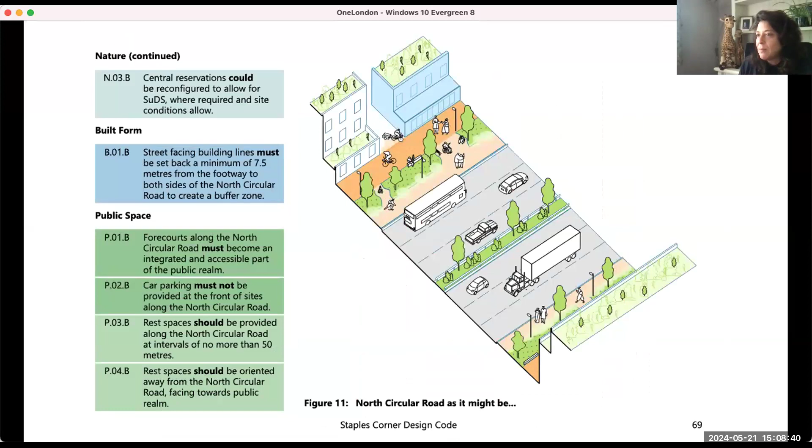A lot of them talk about nature and where the trees should go and what should be happening in the public realm.

All of those codes, and many of the examples you can see on our website—Office of Place has also got a website with some examples, but they've got less there at the moment because they're going through a system of checking the quality of them, whereas the Urban Design Learning website is just putting anything up there for interest.

We're not saying whether they're good or not, but all of them probably say something about streets, and I reckon most will say something about planting on the streets. Maybe they don't all say what the coding for the street trees themselves should be, because they haven't identified it as a priority, or they don't know what to say.

This is why I think what TDAG is doing in producing some actual code material is really, really important—some details, some technical drawings—because local authorities can pick them up and put them into their local authority-wide or area design codes without having to reinvent the wheel, or reinvent the tree pit. There's two types of development in the planning system which would relate to street trees.

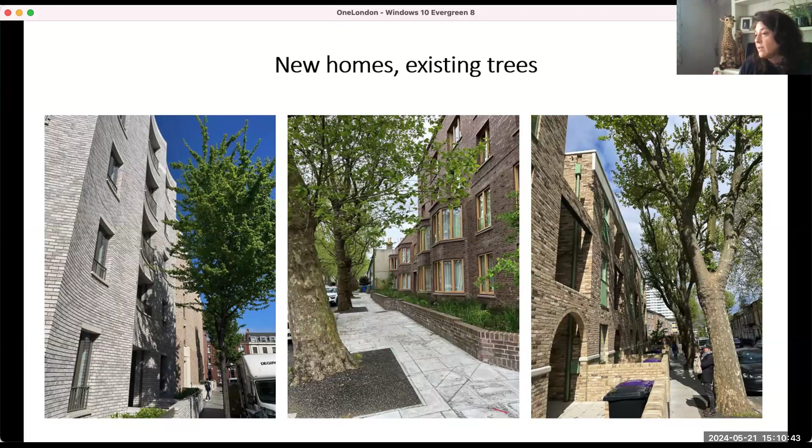The one on the left with a sort of curvy shell-like frontage was actually built off-site and craned in, so there was very little issue with the trees there. The other two are a bit more difficult, but it certainly can be done. So when looking at existing street trees and existing streets, codes can say how infill should relate to them, and policy can as well. And then of course there's new streets.

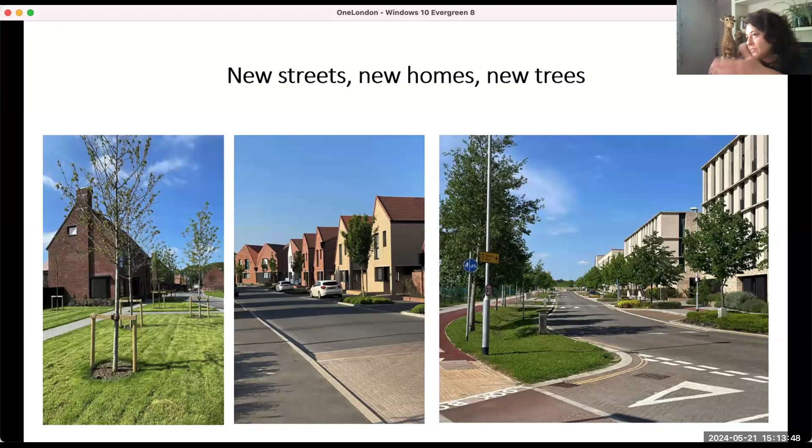Just a very quick note on the difference between design guidance and design codes, which I mentioned before but is probably useful. Your design guidance on street trees may start to talk about wanting some street trees, wouldn't that be nice, and looking for schemes to show us that in their design and access statements. But the code is going to say you must have a street tree every 20 meters, and it's got to be this big when you put it in, and it's got to be this type of species, and that type of planting arrangement.

Now you might feel that's not possible, but if you can get that approved and agreed, especially with your highway authority, if the area you're working in is not a unitary authority, you can get all of those details agreed once in your code. That's going to be much easier than arguing it out for every single scheme, and the developers then know what they have to do, which is what they always say they want. They want to know, otherwise they're in a painful area.

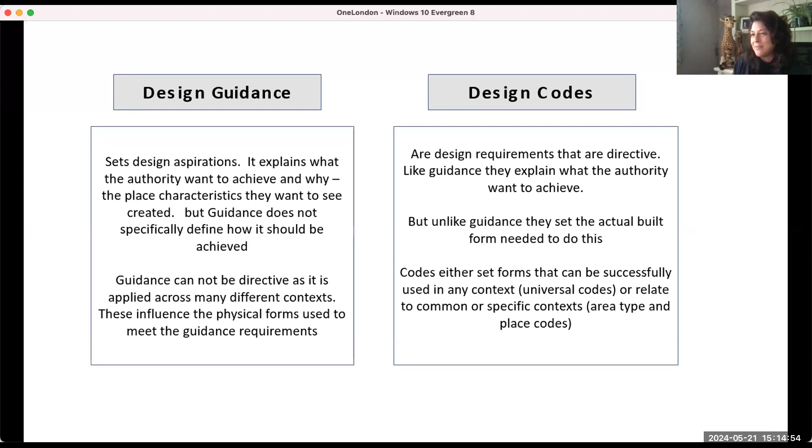And some of that will be guidance, as you saw in that example with the different colours, where some are must, some are should, some are coulds. Some of it's going to be guidance, but the directive codes at the top are the most useful ones to actually apply, because there's much less concern or potential for disagreement or different interpretations of them.

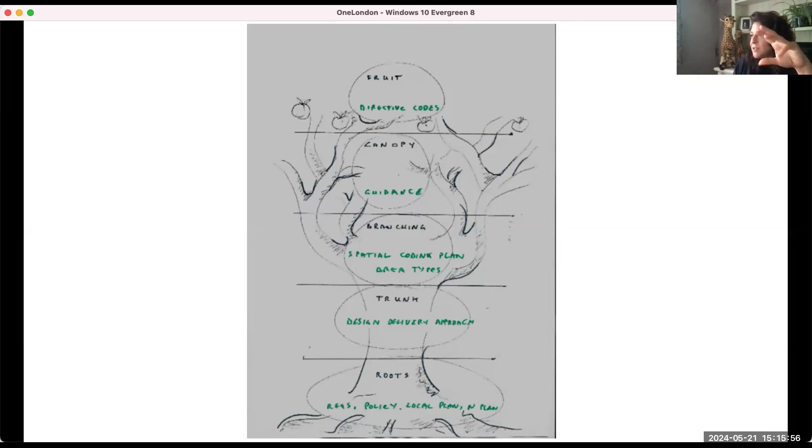So an authority-wide design code, which is the thing that the DLUHC is asking local authorities to do, and they are really starting to think about it now. It's got to be part of their new style local plan. It can focus down on key development issues, so you can find out if your authority where you work is doing one of these, and is it looking at street trees or not as part of it. It can set clear and unambiguous directive requirements, and it can influence site capacities.

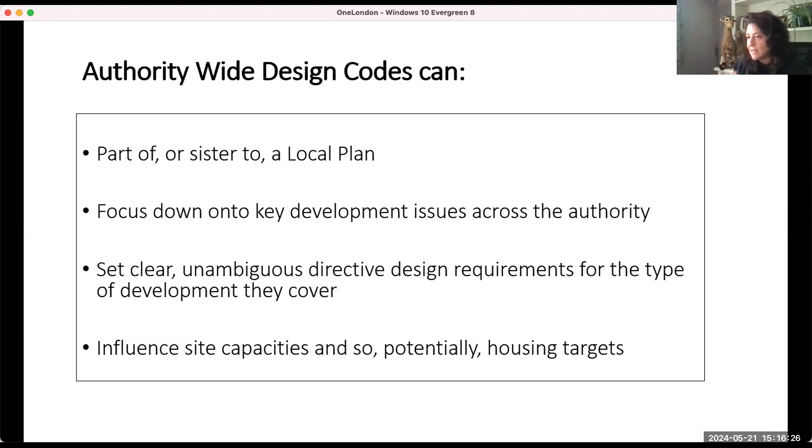I'm not going to go into that here because it's probably not relevant for street trees. They are about stopping the worst design, probably. They can lead to very good schemes, like in Cambridge, but the architects amongst us on the call - or I'm not an architect, I'm a planner, but architects will say, well, you need to leave some flexibility within the code for us to be creative, and otherwise everything's going to end up looking exactly the same.

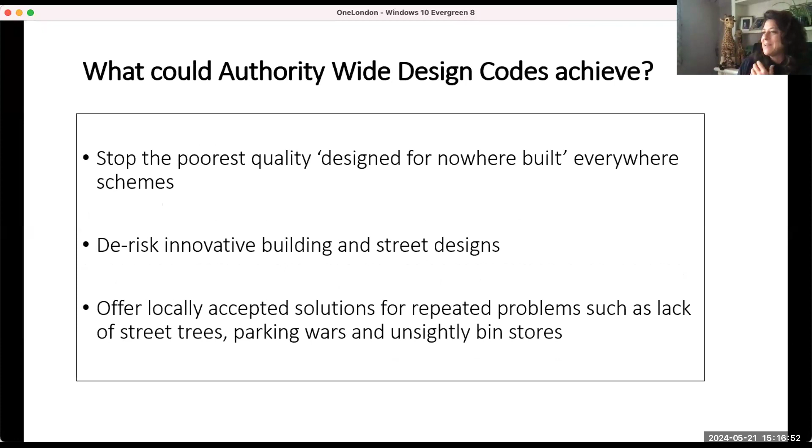So they won't actually replace architectural creativity on a site-by-site basis, although they can include that within the way that they're drawn up. They're not going to cover everything everywhere, and they're not going to necessarily create award-winning schemes. They might do, but they might help an award-winning scheme to be created, because they've taken away the risk on a lot of the decisions, and the architect and the client can really focus on the things that make it very special. And yeah, that's the website if you want to look at those examples.